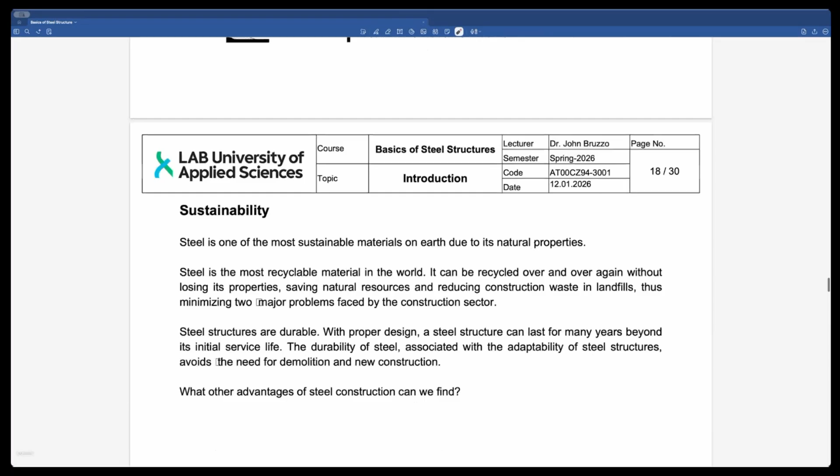And I believe this was the last slide we discussed. It was this one or either this one here, but in any case, yeah, this was the last one. And just to summarize what we did last time.

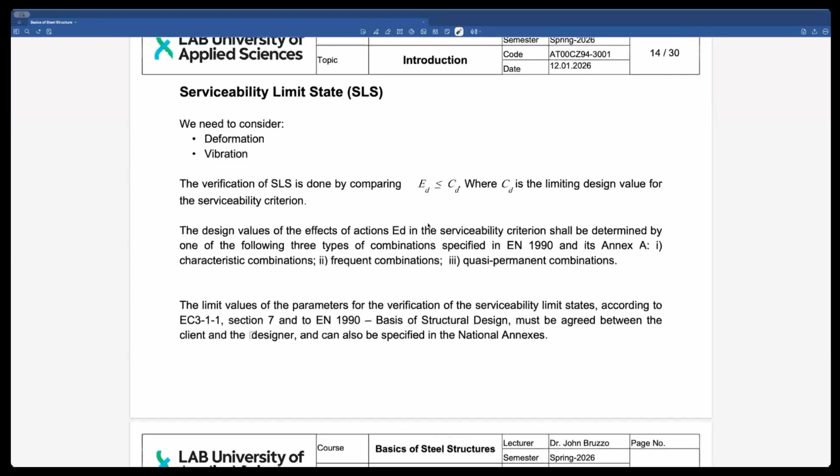So basically we started talking about a few concepts you already knew, like what are the ultimate limit states, serviceability limit states, and we were talking a bit about these steel structures, properties, and so on. Then we stopped here where we were talking about durability, and the message in this slide was that sometimes we are not able to know many things about design because we are new to it.

So, for example, I was explaining the case for me personally about this situation, and actually it happened very early, and I want to repeat it here. So, right after graduating, they asked me to do a design.

I did all my strength calculations, stress determination, everything, and then I needed to use this U shape like this, because here some other stuff were going to be attached to this part, and this was going to be a hinge, practically like this, meaning that this could rotate around this pin here.

And it was perfect because I had designed everything, nuts, bolts, connections, everything there. But then this already experienced guy, who was the one who took all the calculations and comments from engineers and then did the drawings, because the philosophy there was that engineers barely did drawings related to their designs.

So they just focused on verifying and doing all the calculations they needed, and then sending all those documents to this drafter, or drawer, I don't know how to call it, and then this guy would do it. And then this guy said, 'John, why are you using this U shape like this?'

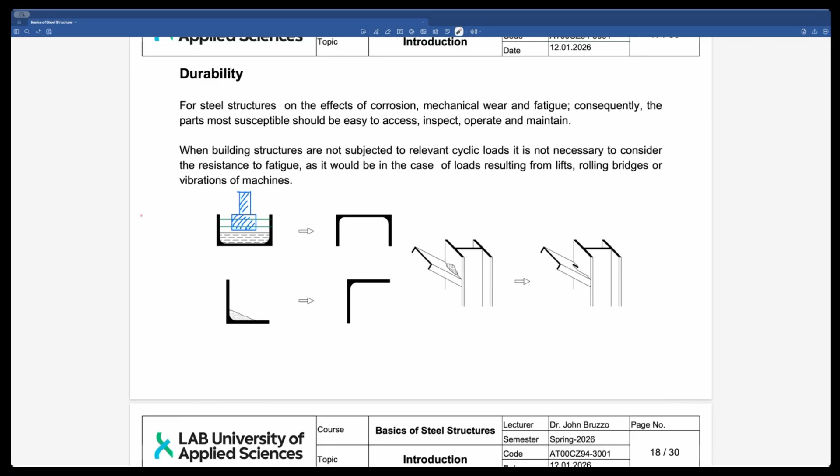Now, I believe we didn't touch on this, but steel is a very sustainable material. We were talking about that because it's the one material that you can build something with, destroy that building, and reuse it without losing its properties.

By the way, one thing that I hate about Teams is that it has a lag. For example, if I draw here, it takes about 2 seconds to appear on your screen. I believe that doesn't happen with Zoom, but I had a problem with Zoom, so I will try to fix it.

And then this is something we need to take into account, the beauty of using steel. It lasts many years if it's taken care of properly, against any possible corrosion or something that affects the integrity of the steel itself.

Another thing we were talking about with steel was that you can shape it basically in any shape you want, and that's a very nice advantage for us as engineers or consultants, because the limitations are only in our mind, let's put it that way.

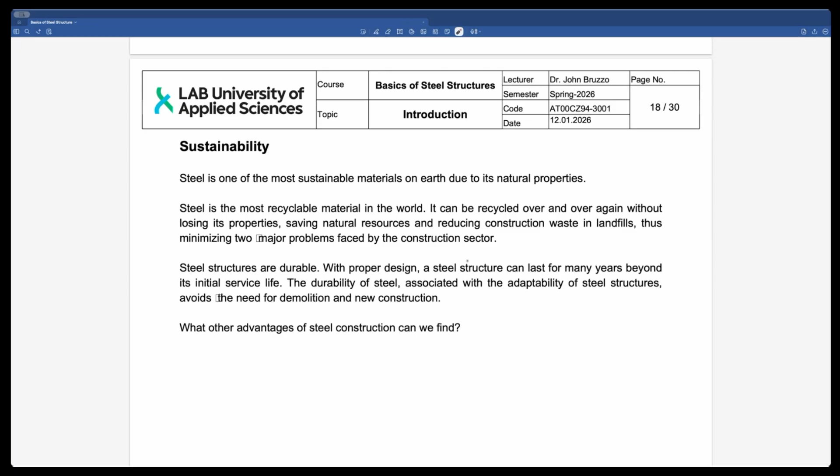Now, have any of you been in these factories where steel is manufactured? You can say yes or no, like in chat, unmute yourself if you want, no problem, I would love to hear you.

No, I haven't. All right, so she hasn't. And she left—maybe she clicked some strange button.

So, steel is iron and carbon plus other ingredients. And for sure, we have standards to cover what's the perfect composition of those elements.

These pictures actually come from the place I used to work. This picture is from the place where I first started working as an engineer. This is called continuous slab casting. I didn't work directly with the people operating this. This is called continuous slab casting.

And what basically happens is that you melt everything—you melt the iron, you add your additives, everything, and then you put it in some sort of a mold, and in that mold the steel starts solidifying, and it takes some sort of big round shape like this. It is a wonderful process.

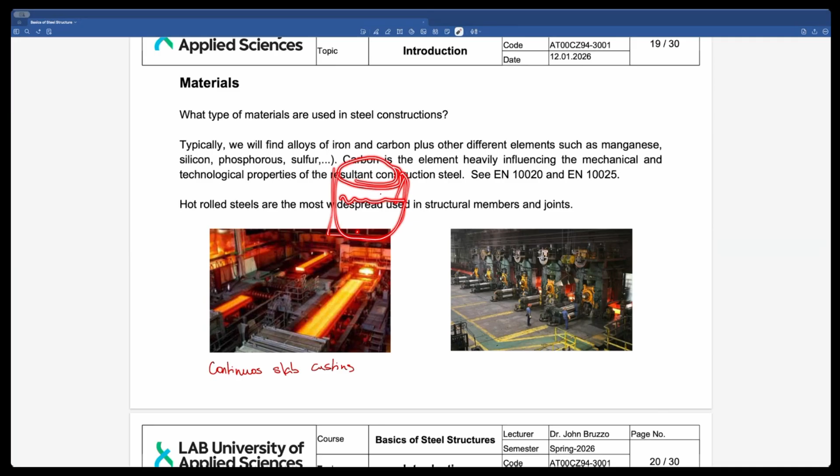Because if some equipment fails here, it's very difficult to get rid of the whole molten pot that contains all the hot or melted iron dripping here. So this is formed—these were about 200 metric tons of liquid steel hanging on top of that. Imagine that. So this is where it comes from.

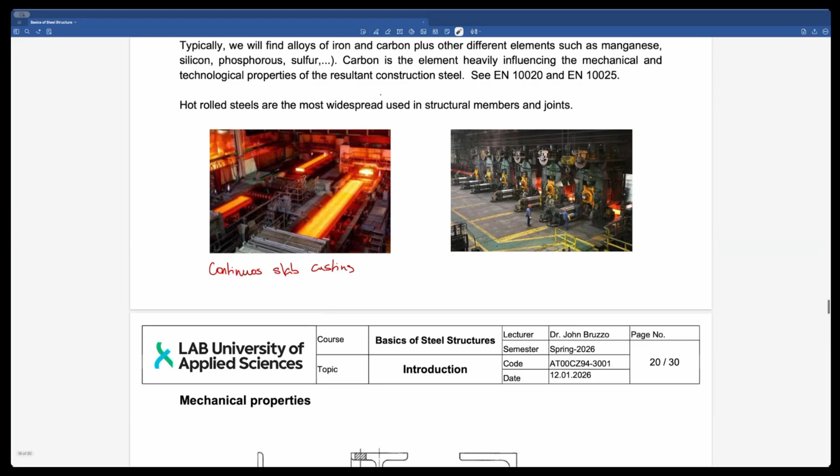One of the formations we were talking about were mechanical properties. And then these are different types of profiles. For example, we have L shapes, T shapes, Z shapes, U shapes, I shapes, H shapes.

These come from these types of materials or similar materials. Sometimes when you have a big project, the material changes between concrete, timber, and steel. On a big construction, you're going to use a lot of material, and the manufacturer is going to tell you, well, this is the quality of the material, these are the mechanical properties, and so on.

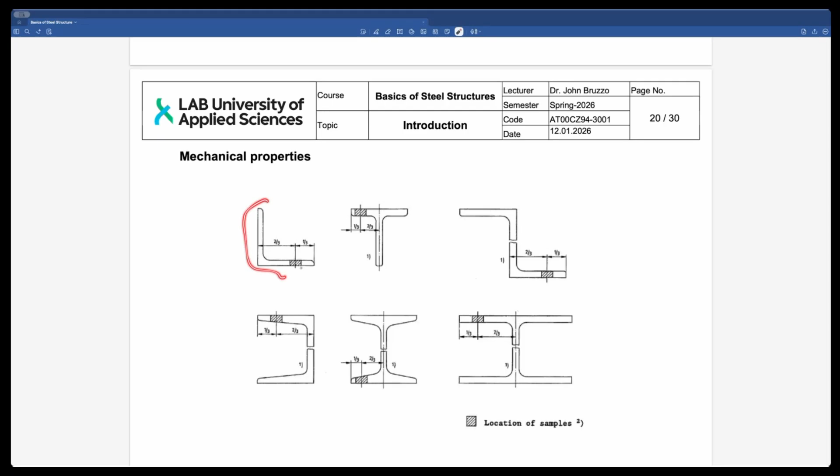I guarantee you that these are, believe me. And then you say, well, you know what, I sure don't believe that. So what you do is take a sample and make a cut of these materials, and this cut usually has this sort of shape.

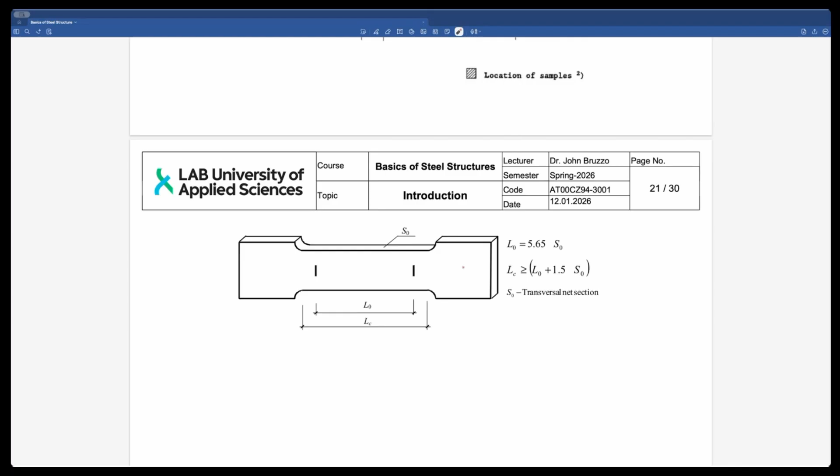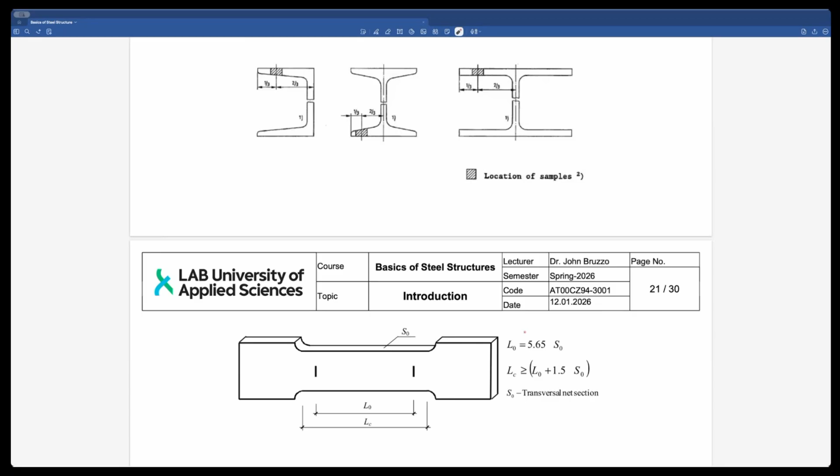With this shape you make a monoaxial, or uniaxial, tensile test, meaning you're going to validate that the sample of material corresponds to what was reported as the original quality for the steel you're using, because it was validated using a third party or an in-house laboratory, depending on the case. This is a specimen which is standardized, meaning these values are completely standardized and people follow it.

And how do they extract it? Well, they just cut it. If this is the beam, or the H, let's use this one, or this T beam here, we'll try to draw it a little bit like this.

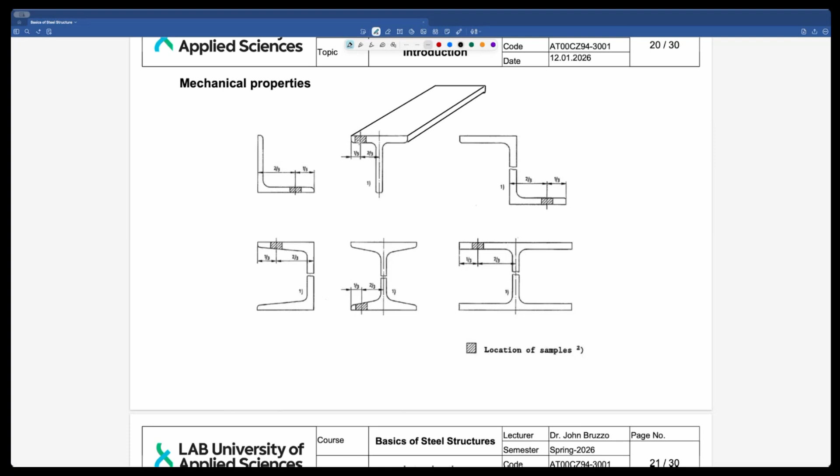So what they do is take this part here, using a different color, and then they cut this from a piece of steel. They form that specimen according to these dimensions.

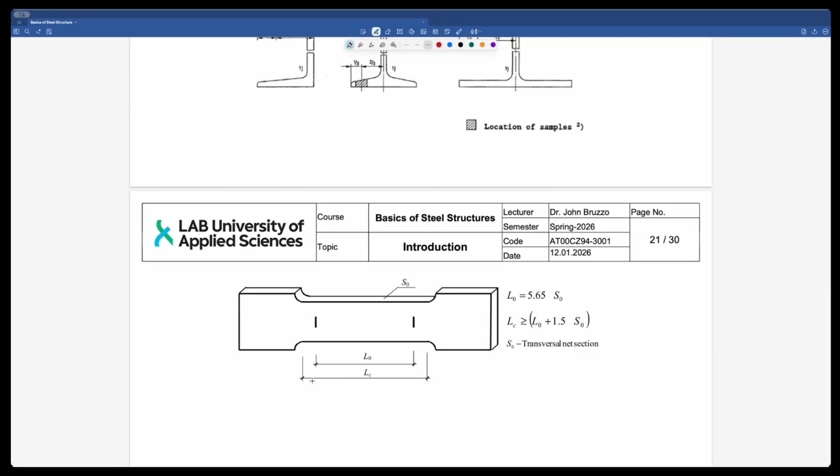After that, they take it to the uniaxial tensile test to validate what we're looking for, which is the yield strength and the ultimate strength.

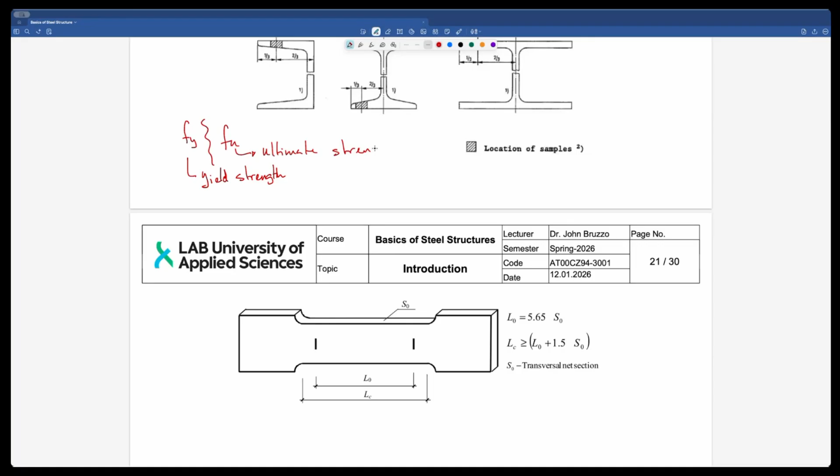Have any of you guys done this kind of test in your professional life? It would be nice to know if some of you have done it and could comment on that. What did you like about it? Any challenge or drawback? Would be nice if any of you who has worked with this before could share.

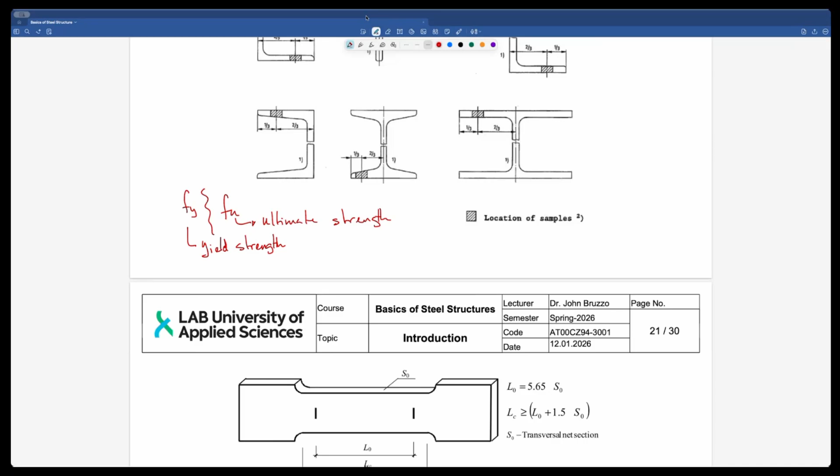The other thing is fatigue resistance. Fatigue covers the dynamics of the building. So fatigue, when you hear the word, you have to associate it with movement, motion. One of the things we deal with in these courses is that we consider these buildings, or the elements of the building, to be static. Equilibrium conditions appear, that's it.

However, there might be elements within the building -- remember we talked about, at least for the concrete part, that there is a resonance, that there could be a vibration in the element. So imagine you have a beam here, and this beam has its permanent load, the one we know, like the weight, some walls, material that is not going anywhere. However, we have certain loads that are going to be variable loads, and they are going to be, as the name says, varying over time.

Let's call it F1, and then let's call it F2, and let's call them varied over time. So we know also that because of this, let me try to put it as a simply supported beam here.

It might be that a small deformation, because of this application of a variable load, exists, going from 0 to a certain maximum value over time. So it's repeating. If this is the center line of the beam, it might be possible that that center line is going to change to something like this, which is that the deformation delta is going to be between a minimum and a maximum.

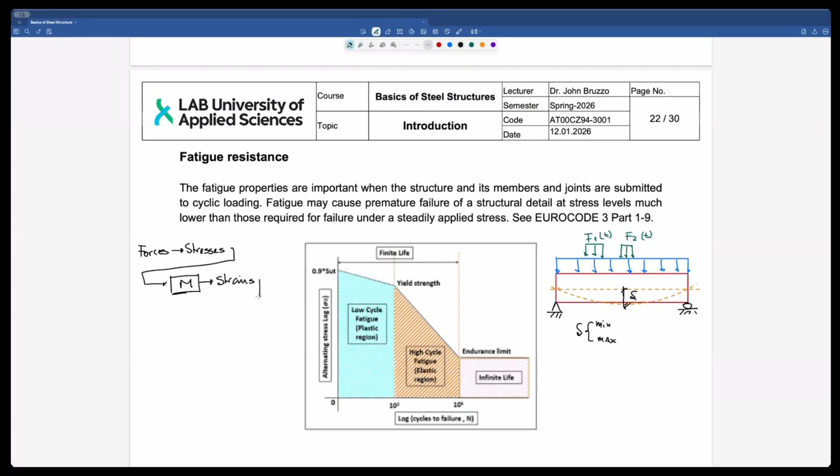So if I have deformation, it's like going backwards in this linear equation. I have deformation, I'm going to have strains. I have a material present, so there's a physical entity there, so I'm going to have variating stresses inside of the material. And those variating stresses could lead to a failure due to fatigue of the material.

But what is fatigue of materials? Well, fatigue is like if we're doing some exercise, some sport, I feel fatigue, like oh, I cannot do anymore. But it's not quite like that in steels. In the case of steels, fatigue means a metal or steel can fail even though the stress applied to it is smaller compared to the yield stress or the ultimate strength. So let's take an example.

Imagine this steel, the S235. We know that the yield strength of this steel is 235 megapascals. But remember from a table we saw previously that it is 235 megapascals depending on the thickness of the material we're using. So let's keep that in mind, but let's consider it's 235 megapascals.

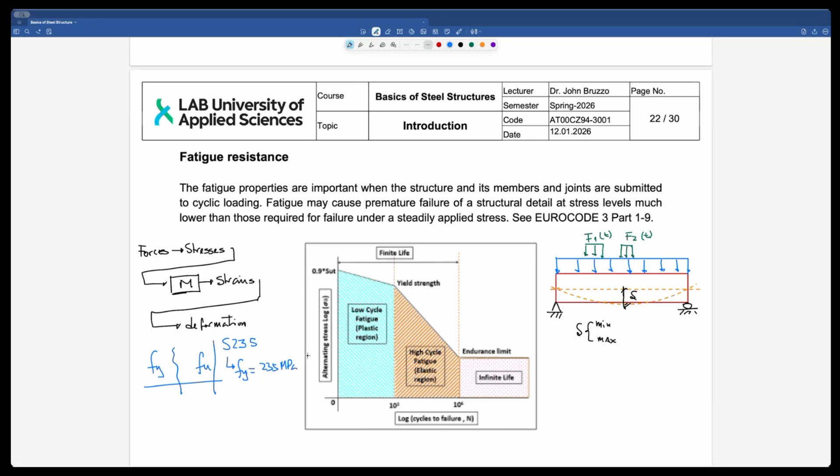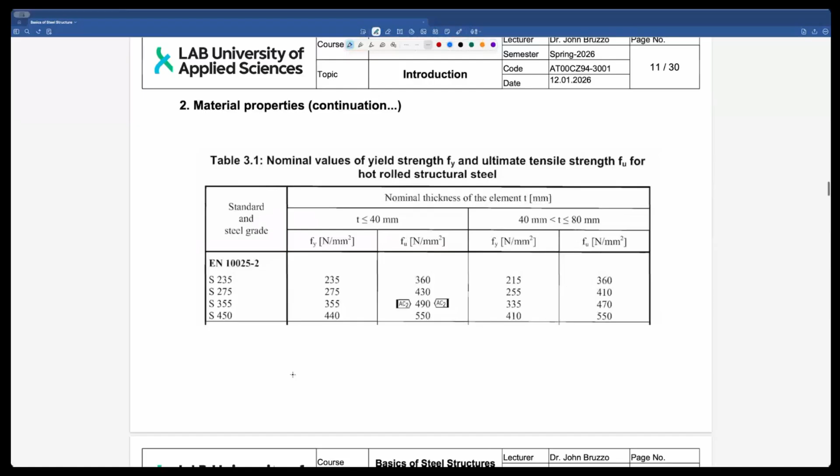And also let's consider the ultimate strength. Actually, we could go to the table I had, so I'm not talking nonsense. 360 megapascals is the ultimate strength. Let me go back here. Wait a second, where am I? Here, 360 megapascals.

So what this says is that these values come from the stress-strain curve, something like this. We have this coordinate reference system, stress and strain, and in the middle this curve, where these two points are the ones I'm interested in. This is Fy and this is Fu, those two points.

So if the stress applied to the material is in this region here, there's going to be only elastic deformation. As soon as I remove the stress, that's going to disappear, so no biggie, nothing happened. However, the concept of fatigue says that if you're applying a stress on a steel repeatedly, and even though the stress is small, something like this level, this steel can still fail.

So 100 or 150 years ago, a German guy called Wöhler devised this curve, called the stress-life curve, where this axis is life, or cycles to failure. This shows how many loading-unloading passages between minimum and maximum are happening. Here you see 0.9 of the ultimate tensile strength, meaning if I would model the S235 steel, this point here would be 0.9 times 360 megapascals.

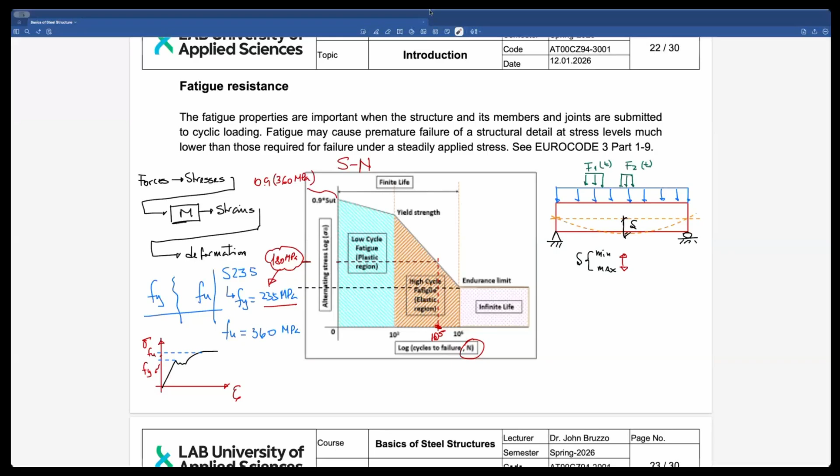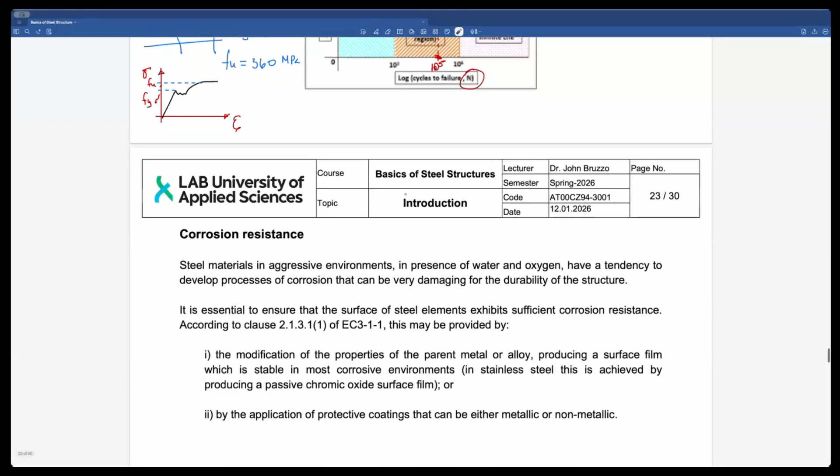Actually, about that question, I don't know if you've seen this. I'm going to try to find it, just give me a second.

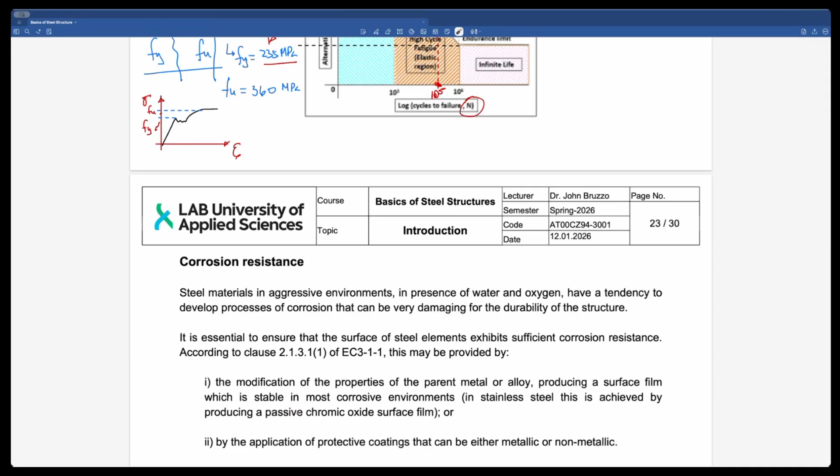I've seen it in Russia, actually. I've visited Russia in the past, about 3 times. I'm going to show you, just looking for a picture — not mine, just from the internet, but I know what to look for. Let me see if I can find it. Here, yeah, this one.

You can see it, remember this was in St. Petersburg, yeah, well, 3 times. Actually I've been more times in Russia than that. I spent quite a lot of time in the past when I was living in Lappeenranta, because it was very easy to just cross the border. It was about 20, 30 kilometers, or less. We used to go to the border to buy gasoline because the price was a third of what it was in Finland. In the evening you could see cars queuing at the customs border — the queue wasn't too bad — Finnish cars just lining up to go to the gas station next to the border, put some gasoline, buy cigarettes, smoke, and then come back a couple hours later. So I visited Russia many times.

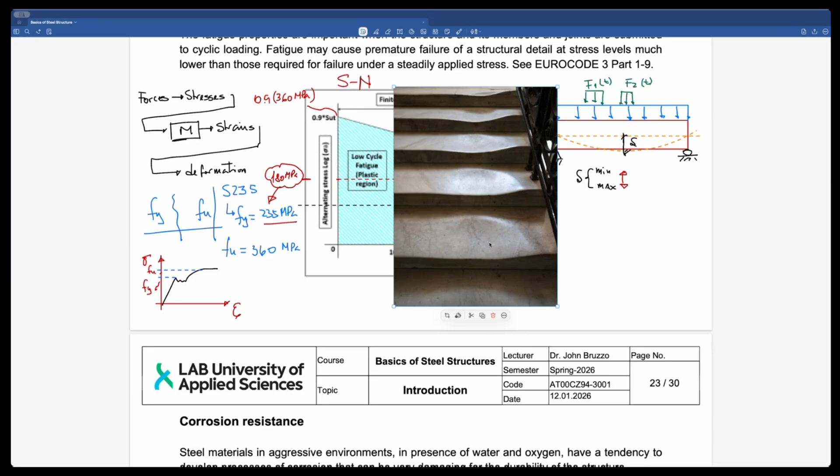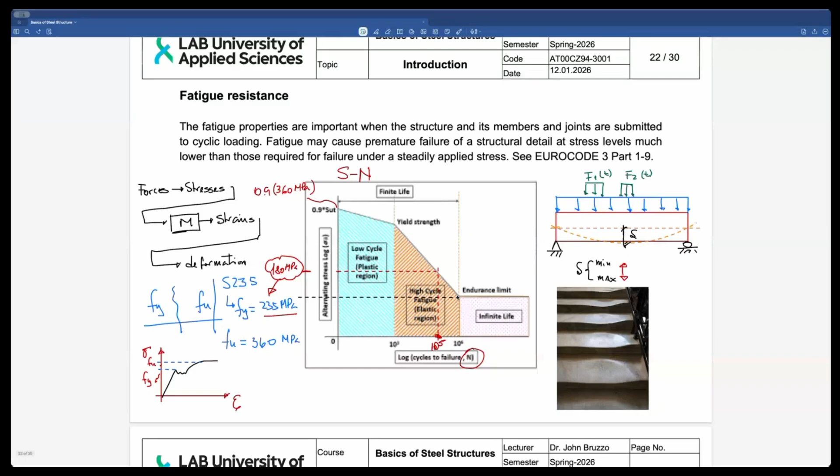So that was one of the things we were talking about, that if it's not going to fail because of an abrupt failure, such as a huge load that exceeds the ultimate strength of the material, or fatigue, then one of the biggest enemies of steel is corrosion. That's why steel parts are covered in specific products to avoid corrosion or increase the resistance against whatever it's going to be exposed to.

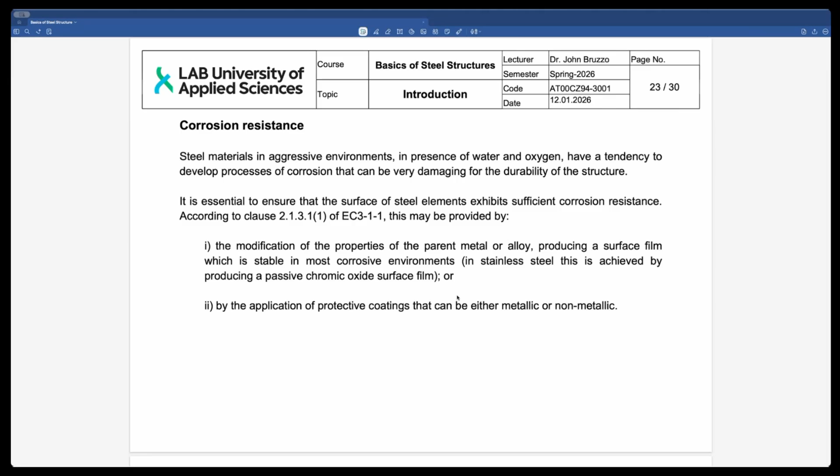What happens with corrosion is that when corrosion happens, looking at it from the point of view of fatigue, strength of the material reduces. Secondly, when we talk about fatigue and corrosion, we were talking about the endurance limit. One of the things used to bring the laboratory test of an ideal specimen endurance limit to a real endurance limit is by using fatigue modifying factors.

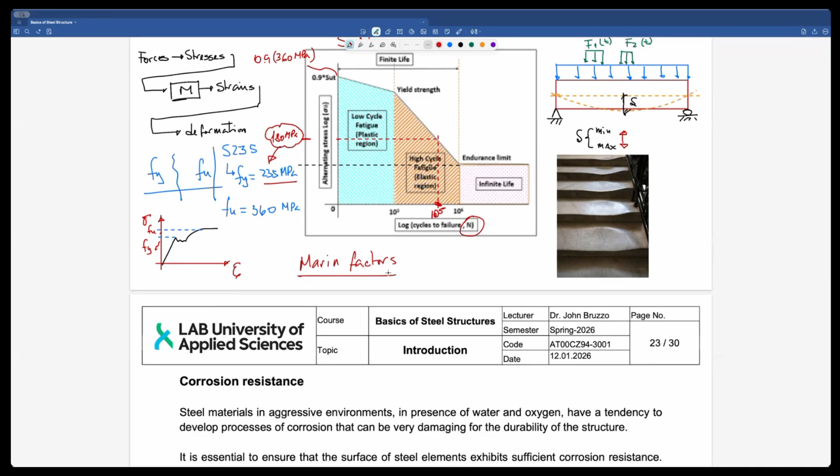They're called Marin factors. Let me write it down here: Marin factors. One of the Marin factors, I believe, is in the miscellaneous factors, where it covers corrosion. When you are in the presence of corrosion, the possibility of a crack appearing on the steel increases tremendously, which means that the material can fail more rapidly. So that's why we need to protect steel against corrosion.

There are other types of materials that are anti-corrosive by default, like stainless steels, or maybe you're working with aluminum. It's not that they have a protection against corrosion, it's that they are already corroded. Actually, stainless steel has a layer of oxide on top of it, meaning it's corroded already. But let's call it a passive corrosion, and that's why it works for us very nicely, because it's already saying, hey, don't worry about corrosion, I'm already corroded basically, because of this layer of oxide that is formed.

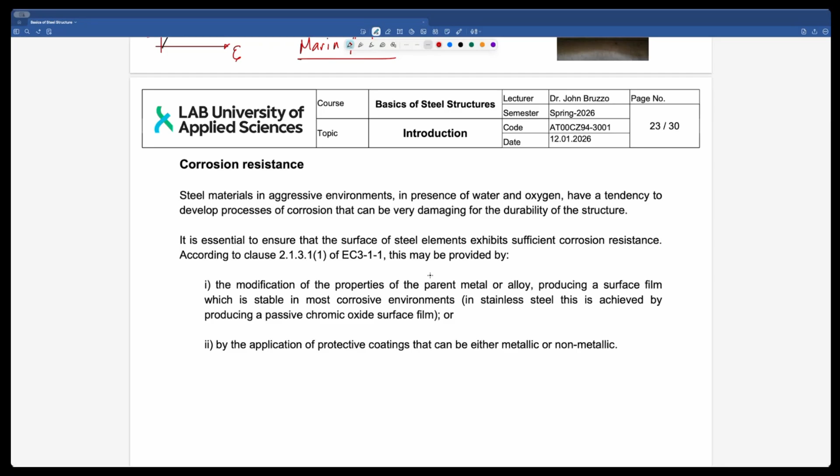So that's what's happening there. But yeah, this is a very important topic that we need to take care of. And another thing that happens is, hey, the uniaxial tension test is fine, but that's not going to guarantee how it's going to fail in a different way. So that's why you're going to find certain... I'm a little bit, my throat is a bit aching, but I'm trying.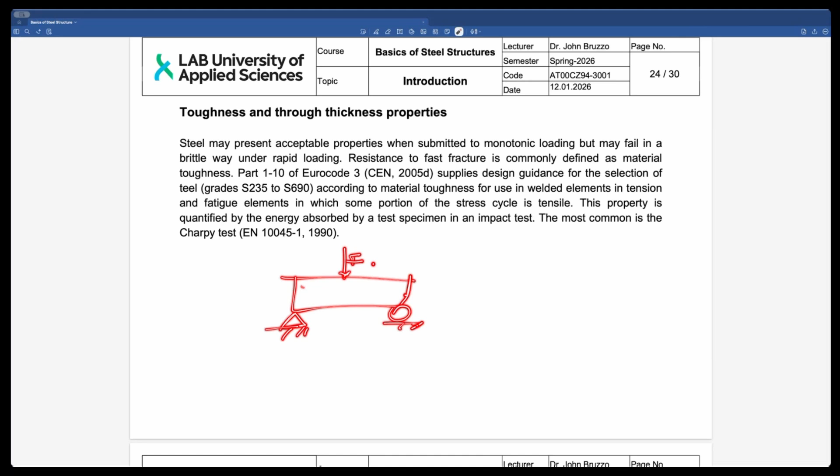There's another type of test designed to tell you, hey, is this going to fail by a rapid loading, breaking because of it. Imagine you have an element, let's keep the beam, and then suddenly, boom, a force appears here. So is this going to fail in a brittle way? Let's remember that when we talk about steels, we have ductile steels and brittle steels. Ductile steels, the ones we actually use for our constructions, are ductile, meaning before they break, they deform tremendously, and then they break. So first you see a deformation, and then it breaks.

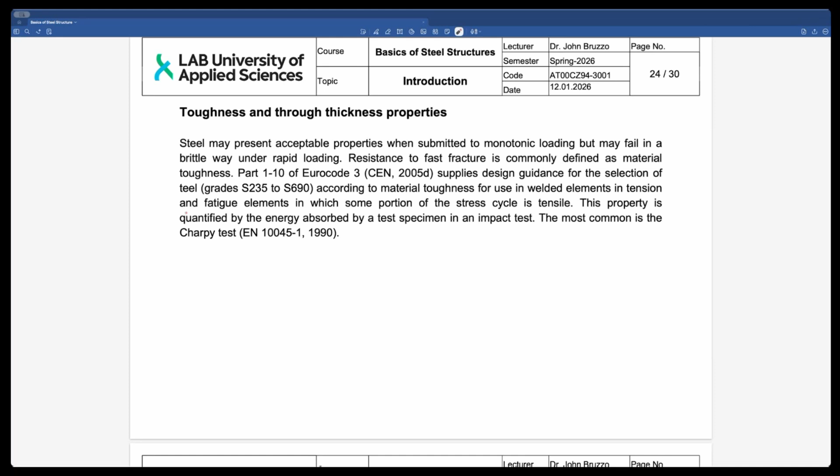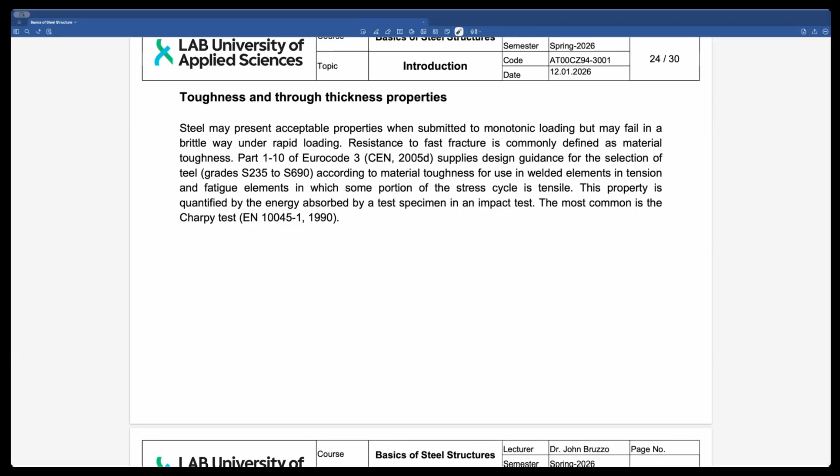However, there could be some sort of brittle failure due to rapid loading, and there exists a test called the Charpy test. Let me check if I can bring a figure of it. It's a very interesting figure... of the machine. Yes, this one might do the job. Here it is.

So what happens here is that you put a specimen. This is your specimen here, let me use the laser. It has a notch, and all of this is calibrated and calculated. So you put it here, and you take this, this big heavy weight, the hammer they call it.

And then you put it to a position. First of all, you don't have any specimen here yet, so you don't put it. You take it to a certain angle or position, it could be 90 degrees or a specified angle depending on the machine.

Once you have the initial position, let's call this the initial position, you put the scale to 0. Then you release the hammer, and it's going to come like this, and reach a certain level here. This might not even move much, it's just going to be there, so just guarantee it's going to be 0.

Then you put it back in the initial position. You put the specimen back here like this, this is where the hammer is going, this is the hammer here. Then you release it, and when it hits the specimen, it's going to break it, hopefully.

That impact is going to make this dial go to a certain level, and this level is going to tell you, because they've devised a scale, that if the scale gives you this reading, then the toughness is going to be this. Basically what they are measuring is how fast this can fail in a brittle way when a sudden load is applied to it. This is known as the Charpy test, and for sure there are standardized versions of it.

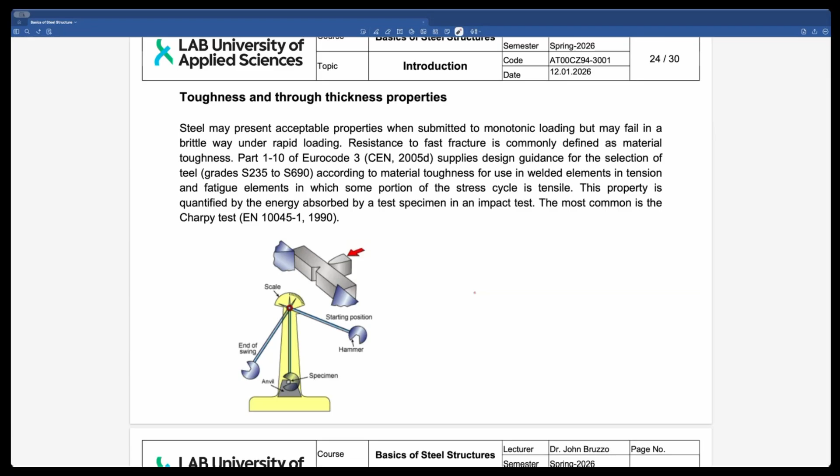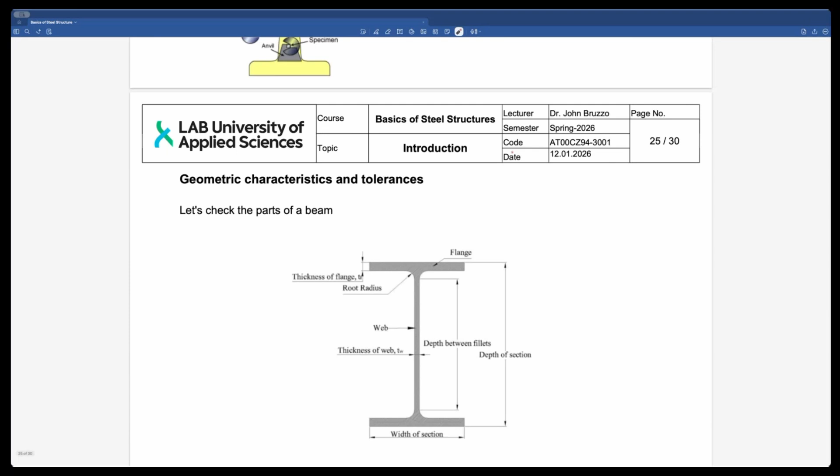But let's look at something interesting, since I believe we have time. This is an I-beam, a rolled I-beam. Well, it's a sort of profile, not a perfect I-beam, that you've probably seen, especially those of you who are experienced. An I-beam has some sort of tapered or inclined shape here.

You have the flange here, or flanges here, then you have the web. You have the dimensions of the web, for example thickness of the web, thickness of the flange which is TF here. Then you have depth between fillets, this is the fillet here.

Then you have the depth of section. Remember we talked about how sometimes you'll find it as height of the section, but typically you'll find it as depth of section, then width of section. And for sure, the root radius. These are the typical values that manufacturers are going to give you.

Let me show you, for example, from one of the manufacturers. Yeah, this is a perfect one because I believe we're going to use it.

So you see, you have the width, the depth, you have the thickness of the web here, thickness of the flange, root radius, width, depth. For sure, one of the dimensions missing is the depth between fillets here. Probably you can calculate it by using the root radius and the total depth, but this is the one we need to keep at hand because we're going to use it.

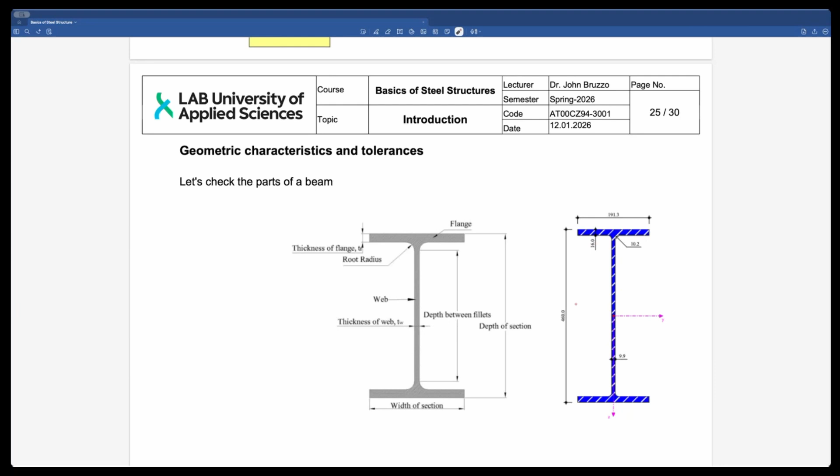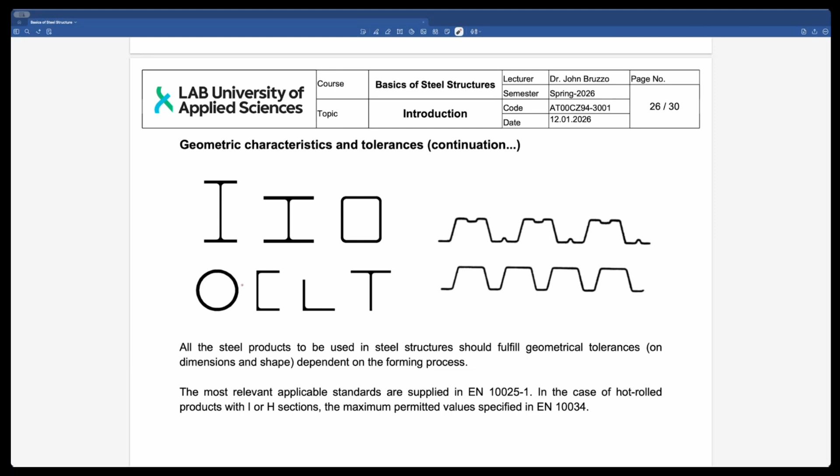Then you have different shapes that we could use, we're talking about this now, also we saw it. We have the IH tube, square tube, round tube, C channel or U channel, L, T, and some other shapes used as composites together with concrete. But one of the most typical we're going to use are the I and H sections. This is one of the ones we're going to do exercises with. I'm not going to exclude, for example, angles or these ones because they have an interesting characteristic, something called the shear center, that we're going to talk about at some point.

And here, for example, from the standards, I believe it's this one, EN 10034, it says, okay, if you're going to buy this kind of material, what are the tolerances you can accept? For sure, when this material is manufactured, it can happen that this dimension is different than the one it should be.

I'm just going to tell you, for example, if the depth is less than 180 millimeters, then you can have plus or minus 3 millimeters tolerance. So what does that mean? It means that if this depth here is 100 millimeters, then you could expect from the supplier of this material that this dimension could be between 97 millimeters and 103 millimeters, according to this standard, and it would be okay.

So is that a problem? It might be a problem, because you need to consider that even though we use precise figures to design steel structures, this tolerance here is a lot. Because you can find two elements, two beams, where one has 97 as depth and the other has 103 millimeters as depth, and what you're going to find is that those two are going to be something like, let's change this.

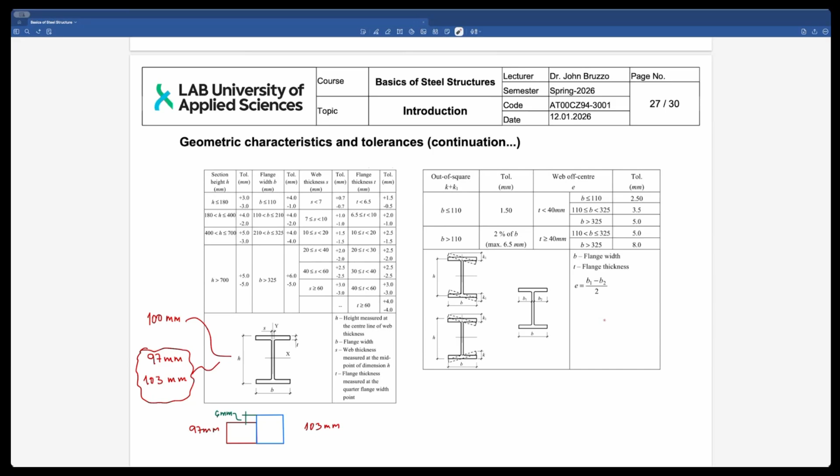Also, you bought a nice 6 meter profile for your design and it's bent like this. So how much is enough to say, yes, I would accept it, or no, I will not accept it? Well, you see that they have this value here depending on the section height or the depth. It could be 10%, 15%, or 30% of the length, meaning that the shorter the depth, the more variation it accepts as tolerance.

Let's take an example. Let's say this is 200, just to make a number here, and say, you know what, I want to know physically what does it mean. So we have this, and let's imagine this is at 200 millimeters depth. If it's 200 millimeters, it means it's going to be in this region here, which means that this is only going to accept 15% of this value as tolerance for the straightness with respect to the section.

So how much is that? If I make a quick calculation of this, it's going to be 200 times 0.15, 30 millimeters. Imagine that. So this could be 30 millimeters, like this, and this 30 millimeters.

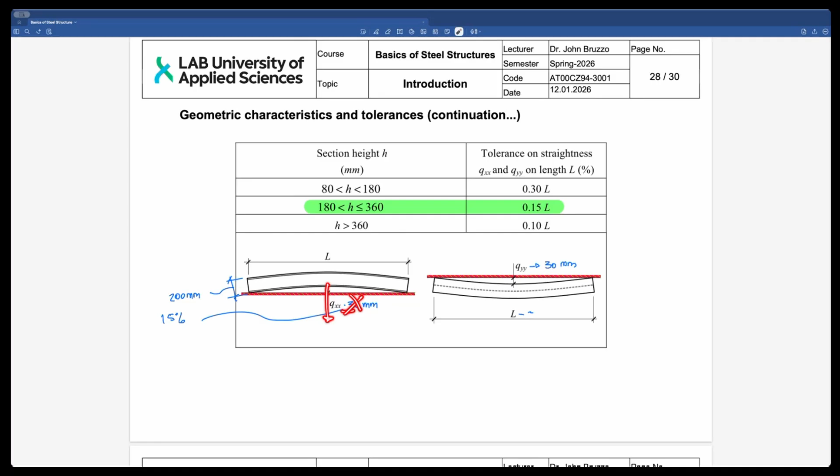Remember this: you have material, and the strain is going to create stress in the material, which means that you're going to have an element where not only the actions on the element are going to be causing stresses, but also your action of straightening it out. So, with all the factors we have considered, if it's following this rule, we are okay, no problem, you don't need to do anything extra. Any questions, guys?

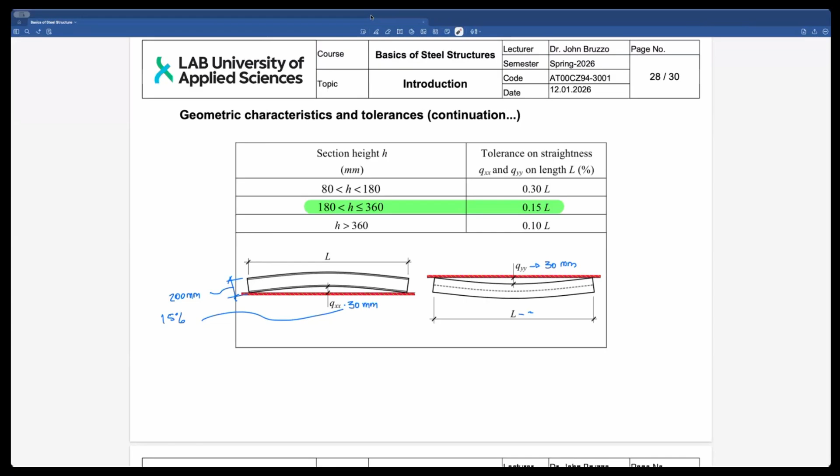With this one, what I want to mention is the same sections we've seen, that according to European standards, we have inertia axis. So if we try to draw the section in a three-dimensional axis, we have y, z, and the one pointing towards the screen, which is x.

In tables from European manufacturers, y is always going to represent the strong axis. Z is going to represent the weak axis, and X is going to represent the longitudinal axis.

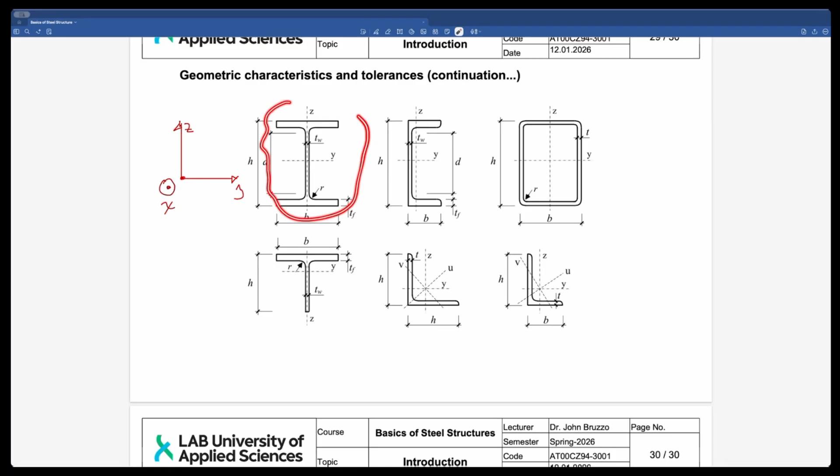So just to be clear, Y is always going to be the strong axis. What do I mean by strong axis? Let's take this beam here. If I applied a load here in this direction, F1, it would require a certain amount of load to create a certain bending moment about the y-axis. This creates a moment, or bending stress.

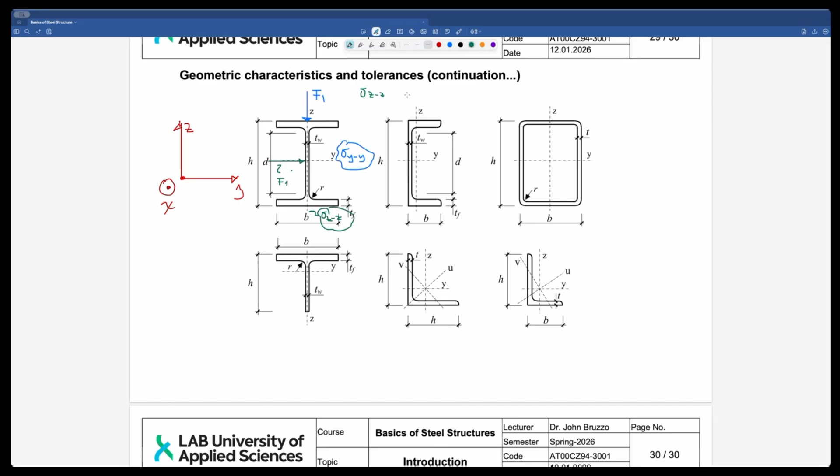But if I applied another force, or the same force, in this direction here, this creates a bending stress around the ZZ axis. So for the same value of force, the stress created around the ZZ axis is going to be larger than the stress created in the YY axis, because of the geometry of the section.

That's why this is called the strong axis and this is the weak axis, because if you want to support the most amount of force, you better use it in this position, applying the force so the bending occurs around the YY axis. This is a good representation: if you want to take the maximum out of a beam, use it so the bending is around the strong axis, the YY axis.

Same happens with this one, and you can do the calculations here. Same happens with this one, meaning it's easier to bend the beam if you apply the force here than if you apply the force here. That's what it said.

Any questions, guys?

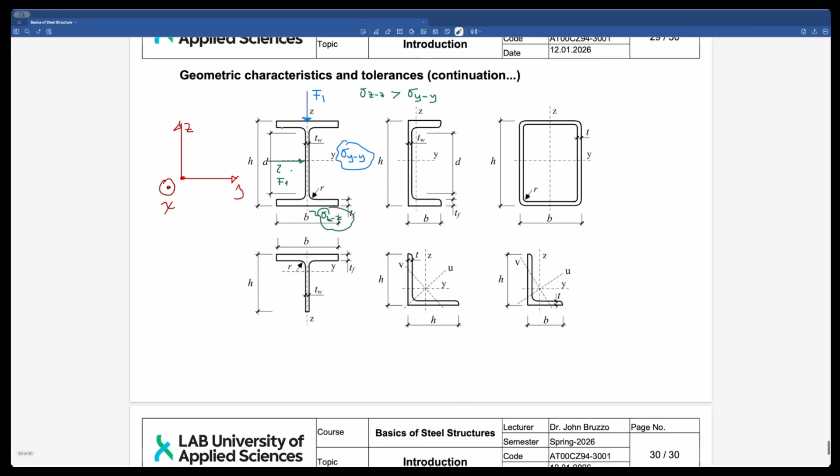Let's jump to another thing. We've talked about a lot, but let's try to start doing something practical. Stop sharing, and I'm going to jump to this one here. Share content, screen, window.

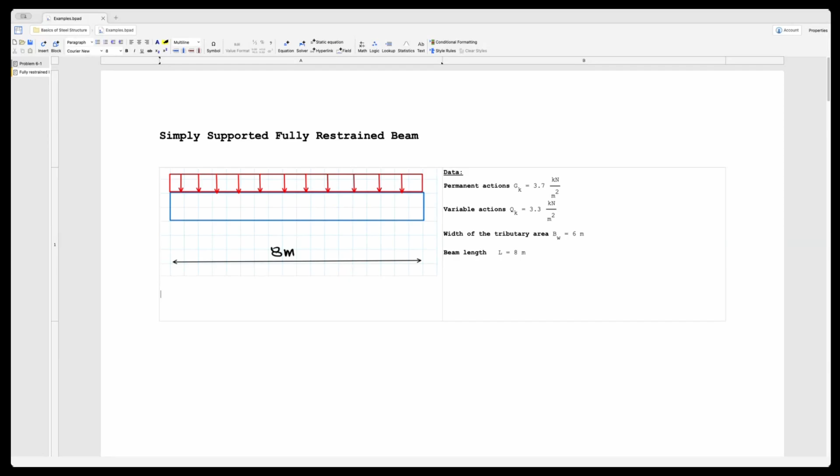If you can see it. Let's see what happens when we try to do something practical. Let's imagine we have... I'm going to look for it. Maybe this one. Well, yeah, this could work. One of the characteristics is that, well, maybe this isn't the best one. I hope you could see my annotated screen. Try to follow with the small pointer of the mouse.

So I mentioned there is one of these beams here. We want to calculate one of these. One beam here. Usually what happens, or what you're going to find, is that most of the time the beam is only affected by a uniform load, like this one in red on top. You have the beam in blue, and then related to floor, walls, partitions, equipment, it could be like this.

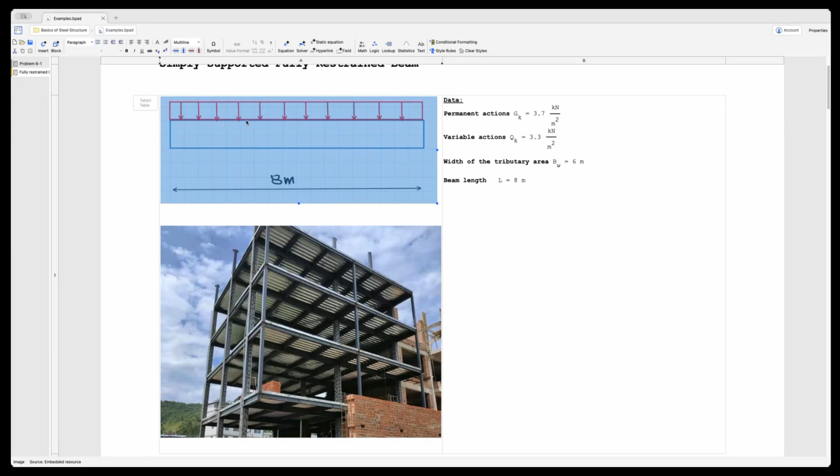Let's remove this. Previously we discussed this. So you're going to have permanent actions, and what I call this... actually I can't see this chat here. There it is. There it is. It could be the floor, walls, ceiling, services, something like that.

Then that load is divided. You have your permanent actions. Remember, when we talk about codes, whatever loads, moments, or whatever we're talking about, we call them actions, what is imposed on the element. Then we have variable actions, for example, people moving, or equipment shifting from one side to the other. Here I don't have any accidental actions such as wind included. So very simple.

We have the values for the permanent actions and for the variable actions. This example we won't be able to cover fully in the remaining time, but we'll continue it. We have the beam length, which is 8 meters, and then we have the width of the tributary area. Let's remember what the tributary area is.

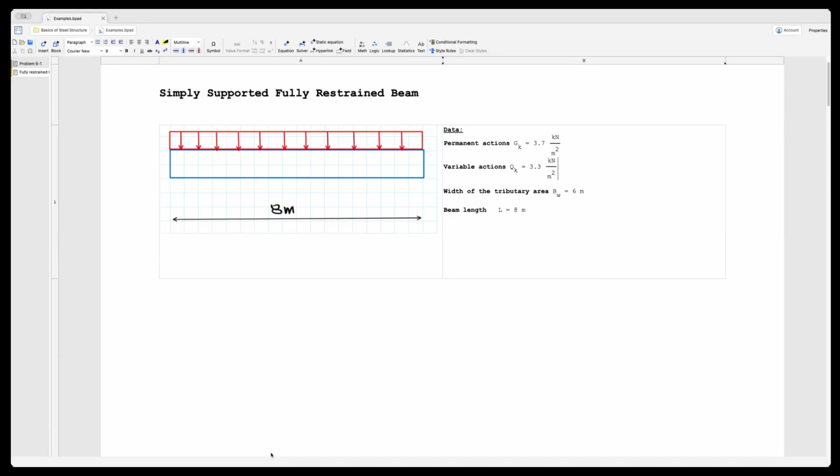I hope that you do. I'm going to try to draw it, so it's better to bring it up. I'm going to draw the beam, just wait for me. I cannot draw there, and this Teams thing is killing me. Just a second. One more second. Let's copy this. Oh, there it is.

So if this blue is the beam, then the tributary area is, well, we have beams stacked one next to the other, and then we have a floor on top of several beams. So how much of the floor is standing on top of the beam, or how much of the floor is the beam taking? The tributary area, there are ways to do it, but basically the simplest one is to imagine a rectangle here, and if I have another beam on the side, that's going to be the tributary area. I could do this, something like this, where kind of the next beam is here. So you split this by half, and then you say this portion of floor is what the beam is taking care of. That's why we have a width of the tributary area and then the beam length.

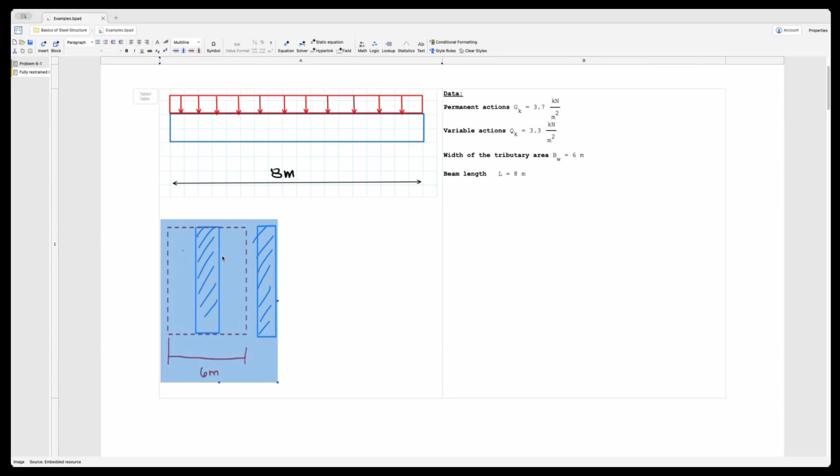After having that, we know that these values, as shown by the K here, are one type of value. Remember that in design we have design values, representative values, and characteristic values. So when it's given like this, with a K, as in the slides, these are characteristic values, but we don't use characteristic values right away. We need to modify them to convert them into design values.

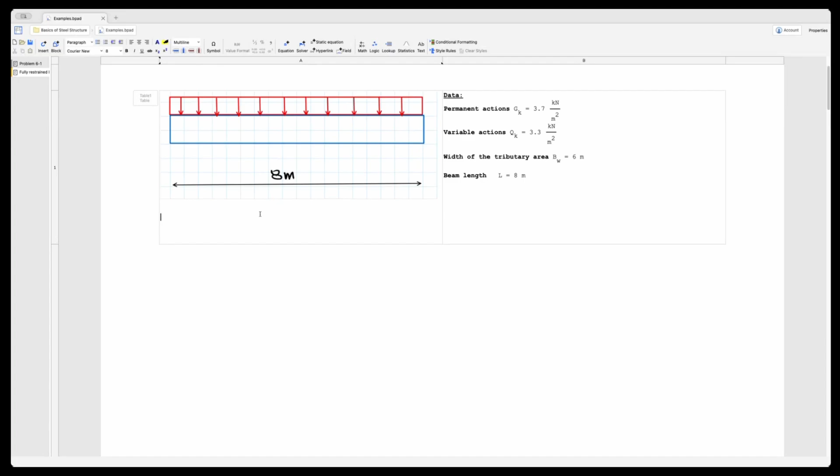And we do that by using something called partial factors. So for example, let's try to write here. In the design process, we also talked about verifying our design using the ultimate limit state, and the serviceability limit state. These are called ULS and SLS. The ultimate limit state is to guarantee that the thing is not going to break or collapse. The serviceability limit state is going to guarantee that it's going to be comfortable for the people and everything using the building, people, machines, whatever. The deformations are going to be kept to a limit, vibrations are going to be kept to a limit, and so on.

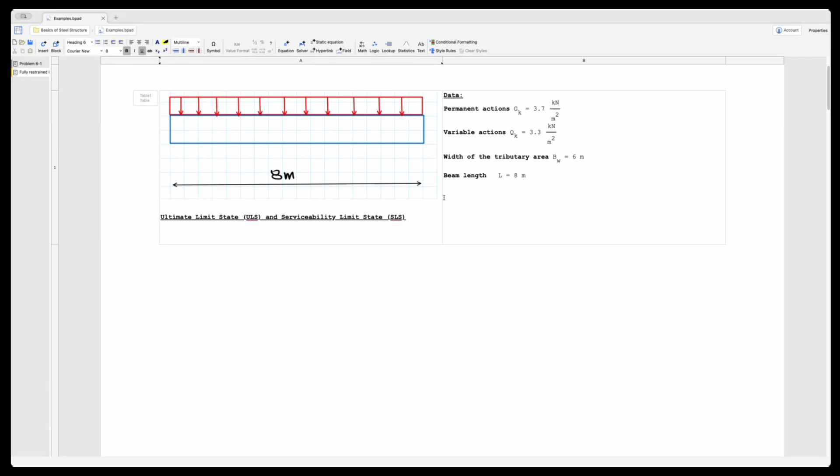So the first thing we're going to do is try to find out the beam profile that could hold these actions under these circumstances, meaning it's not going to break, and the deformations are going to be within the limits. For that case, we cannot use the characteristic values straight away, but we need to use the partial factors for actions. And then we say, you use this.

And then you have the partial factor for variable load action.

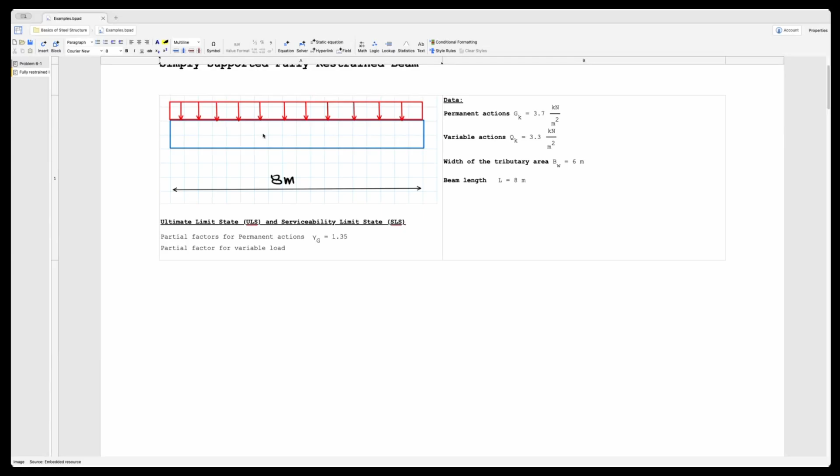And that also is going to have a designation, and we're going to call it gamma Q. And that's going to be, for our case, equal to 1.5.

Awesome. But additionally, even though it seems a little counterintuitive, you say you're not sure about the value, but then you're increasing all the values just to cover back. So we need to use a reduction action, so you're not over designing your stuff. And that's called the reduction factor.

And that reduction factor is expressed by the letter xi. And that's going to be equal to 0.85.

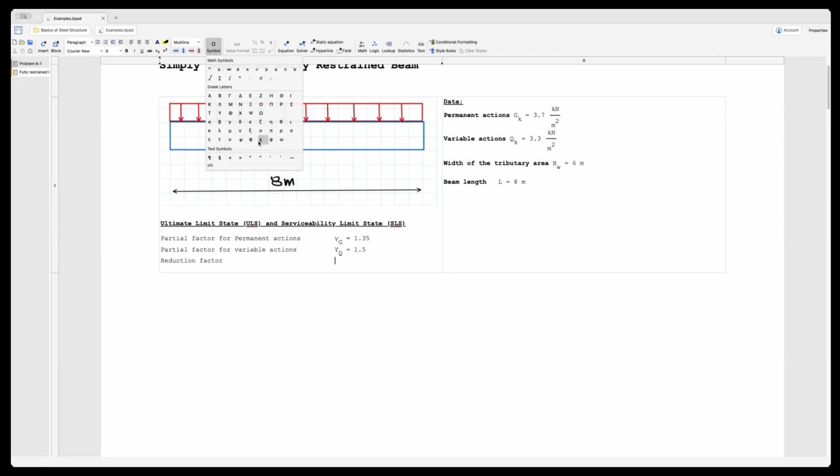Now that I have my partial factors, and we're going to talk soon about this again, the question is how do I combine these loads? What you're going to do is say, let's call it action combination. And it's going to be a multiplication of several things. This is going to be expressed as the reduction factor times the permanent load partial factor times this term, plus this term, plus this term.

I have a mistake here. This is times. There it is.

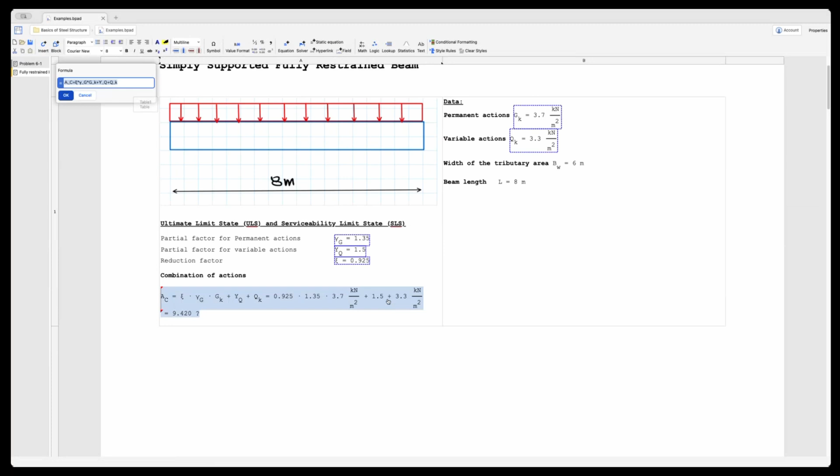So if you see this equation, the first part tells you how to deal with permanent actions, and this part tells you how to deal with variable actions. This is called the partial factor method.

You know I've said a lot that we engineers like to apply safety factors, because we're uncertain about what's happening in reality. So we say that if a load is 100 kilonewtons, we're not sure what's happening inside, so let's assume that it's 120 kilonewtons. We increase it by 20%.

But when you have actions of different nature, like permanent, variable, or accidental actions, applying a sole and only safety factor to all three carries a lot of over design. So the partial factor method says, let's divide the actions by nature, permanent or variable, and apply a factor to each one per nature.

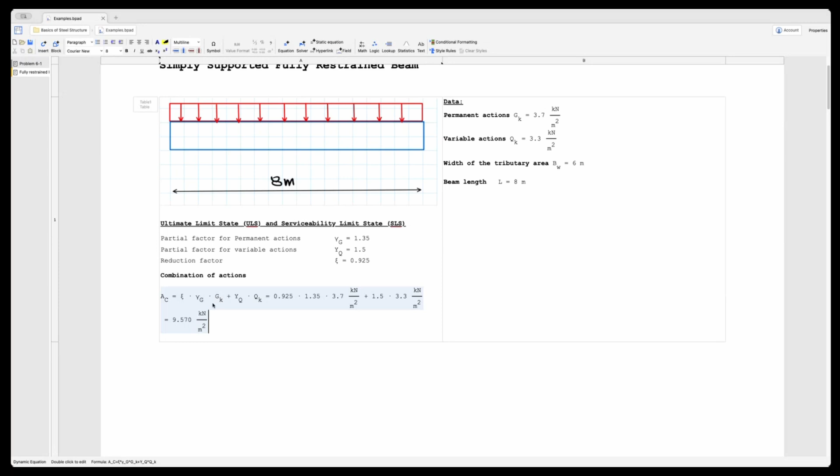So that's why here, for example, in these first terms, this is the factor modifying the permanent actions, and this is the factor modifying the variable actions.

Permanent actions are those that don't change over time, such as the self weight of the structure, any material, walls or partitions that are going to be there - you're not going to move them.

Variable actions are loads that can be there and vary over time - those are the estimations you're going to have, like people walking on a floor. If you have a floor where 200 people work, sometimes you'll have 200 people, then 150, then zero because everybody went home, and so on. So that's a variable action.

Machinery that is going to be transiting, forklifts or vehicles or whatever - so that's what we have there. That's why, but now, these are the combination of actions.

So tell me what the design force is that I need to consider, because this is a uniformly distributed force applied on the beam. So what's the design force? The design distributed force.

Well, the design distributed force is going to be the combination of actions, which is in kilonewtons per square meter. But if I take this combination of actions and multiply it by the width of the tributary area, then I'm going to transform this force per surface into a force per length, which gives me the distributed load.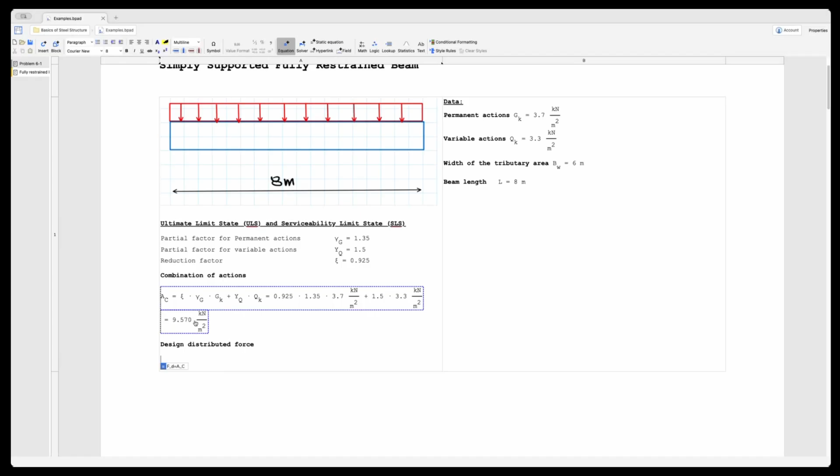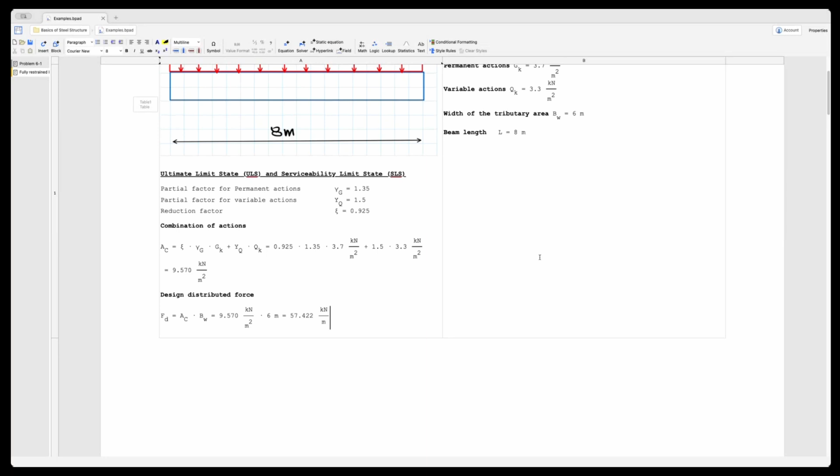Then I'm going to say the design distributed load is going to be the multiplication of this term and this term, which means that the distributed force is going to be 57.4 kilonewtons per meter. So here I could write 57.4 kilonewtons per meter.

Nothing we have done so far is amazing, it's just multiplying things. All of this is extracted from the standards, all of this is found there. Do you guys have a question?

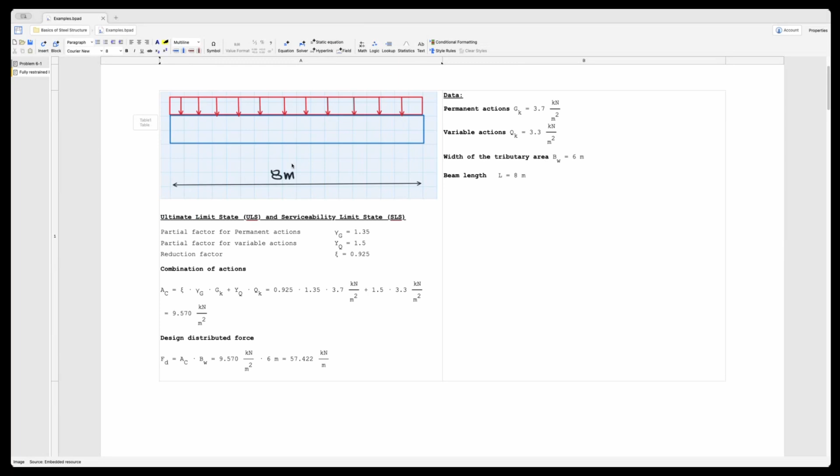So this is a typical beam construction, and we know that the maximum bending moment is going to be located in the middle of the beam. That's a formula that many people know, but let's write it here.

So the standard here is that the maximum bending moment, and look at this, we're using the strongest axis as per our discussion before. It's going to be equal to the design force times the length of the beam, which is 8 meters to the power of 2, divided by 8. There it is, this is the design bending moment, and this one is around the strongest axis.

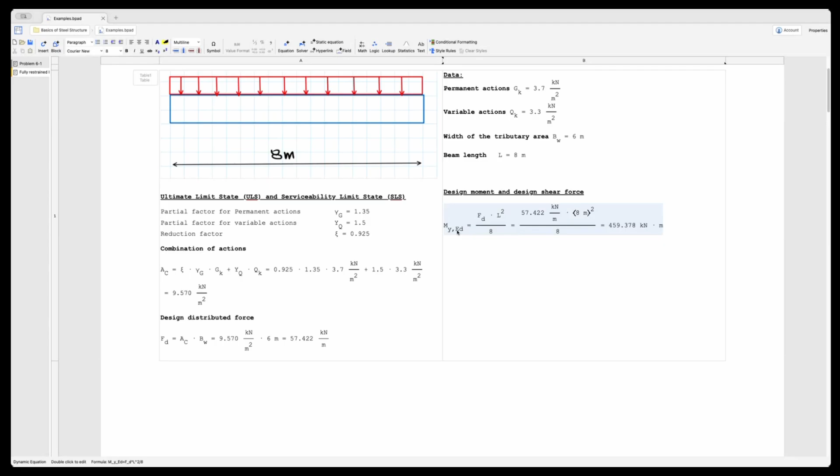Remember, strongest axis and weakest axis. Now, remember, because actions on structures create effects, and those effects are compared with the resistance of the material. That's why it's called here the design effect moment around the y-axis. It's saying, well, for this case, my friend, it's going to be 459 kilonewton meters.

Awesome. Now, in this case, we know the maximum bending moment is in the center, but we also know that the maximum shear force, a very typical case, is going to be at the ends. Let me put it like this: bending moment is this, and shear force maximum is going to be, again, a formula.

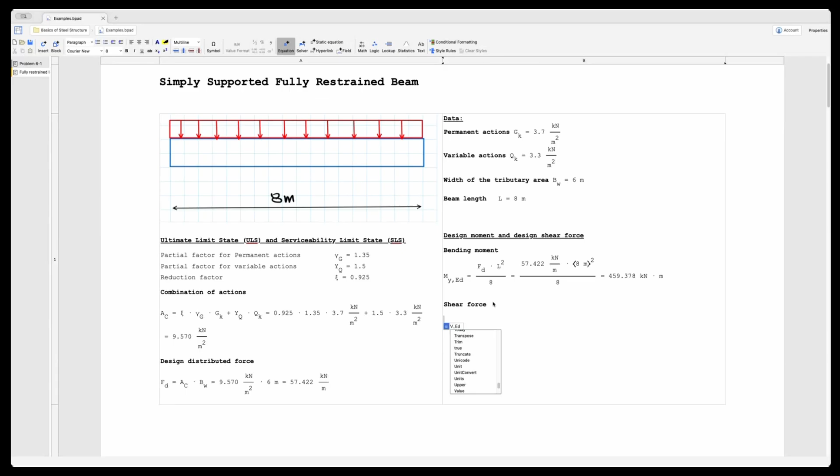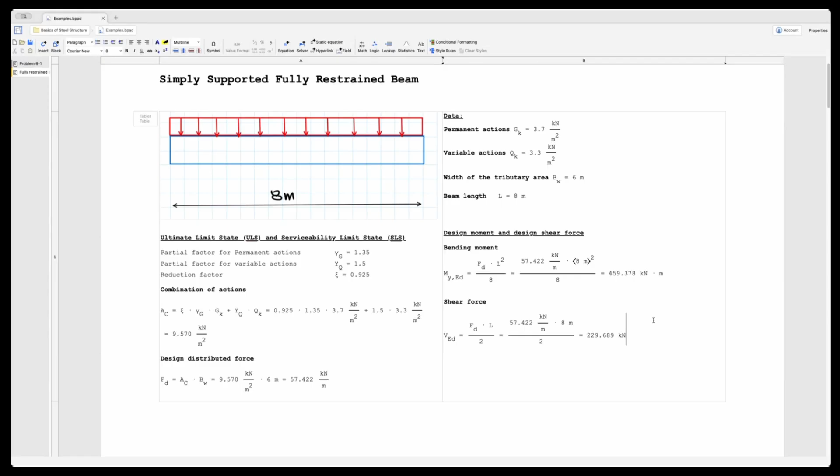We're going to stop soon, but the next thing I want to highlight is I know I need to select a geometry and a material that can withstand this bending moment and this shear force, because we need to verify it's not going to fail either by this or by this. So the standard tells me I need to use a partial factor for resistance. If I use a partial factor for permanent actions, then I need to use a partial factor for resistance, material resistance.

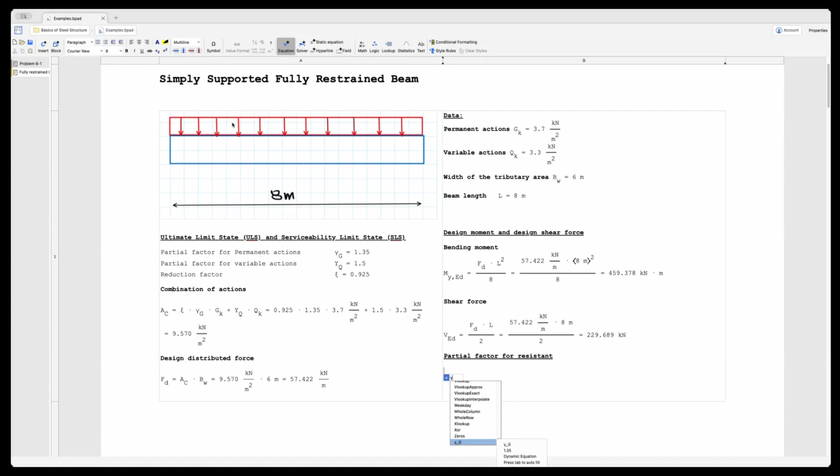And here it is. That's basically depending on how this is working, if it's bending, compression, or if it's a column in buckling, or another effect. There are at least 3 different partial factors, and this is going to be equal to gamma m0, which equals 1. Remember, there are factors left at 1, and you'd ask why leave a factor as 1 if it doesn't modify the value it's multiplying. Well, because it could change in the future.

So having this, we're going to stop here, but the next step would be to find out what section we would need to use and how to do it. Okay, let's stop here.